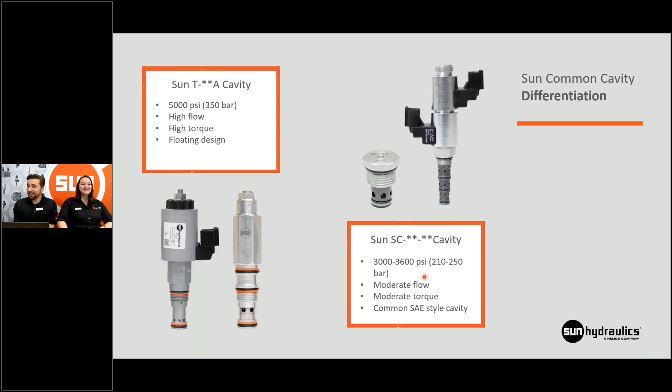Now when you want to integrate a Sun product into a manifold that already exists, you don't have to worry about changing out your cavity. We have more options for you now. So Dan, could I get you to start introducing some of these really exciting products to us? Yeah, absolutely, I can't wait. Let's have a look here.

The first product I want to introduce, I'll introduce about 10 products to you guys today. I want to start with the DNUC and the DNTC. These are 3-position, 4-way cartridges that have been out for about a year. Some more products I'll share today just came out last week, so you'll see a lot of new information too. The letter U in DNUC is size 10 common cavity, SAE 10. The letter T is common cavity size 8. Those are actually two of the most popular common cavity profiles. They're 4-port, 3-position, 4-way, and of course it's cartridge valve technology.

Comparing this to a CETOP valve for directional control: a CETOP valve is typically cast iron, a cast iron housing with a sliding spool inside - kind of a parts-in-body design, whereas this is a 3-position 4-way in a cartridge valve. That means you can put it into a custom manifold, making a small, tailor-made manifold for a specific machine. Compared to a CETOP valve, which has at least 4 O-rings between the CETOP valve and the valve below - those are potential leaking points - with a cartridge, you screw it into the manifold and only that uppermost seal is a potential leaking point out to the environment.

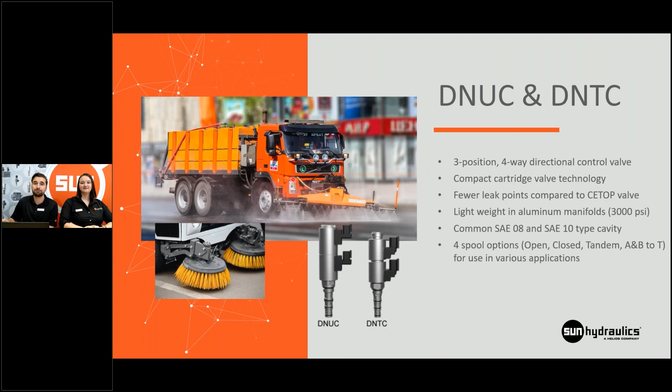Here's one example, let me share the hydraulic circuit. So here's your center condition - this is the closed center version. Energize coil A, and you'll flow from 3 to 2. Energize coil B, you'll flow from 3 to 4.

So that's kind of the profile of the DNUC and DNTC products. You can see the 2 different sizes here. If you need a very compact solution, we've got the size 8 DNTC.

Hey Dan, I see that we have solenoid coils on these. Are these a new solenoid coil that we're introducing? They are. So these coils are new, and they are specifically designed to power these products. There is some interchangeability with some of our historical coils, but the standard option is a new coil.

Okay, so you'll see those on the Sun website. You can look up the 779 coil for the size 10 products, and the 769 for the size 8 products.

And you can see in this hydraulic circuit, on the hydraulic cylinder, we've got our closed center DNTC here. And then on the right, for hydraulic motor control, we've got our A and B to tank, DNUC.

So just some examples of how some of these might be plumbed in as a 3-position 4-way. I'm going to control the motor clockwise and counterclockwise with my directional control valve, and here I'm going to control my cylinder's extension or retraction.

So this is kind of the heart of so many hydraulic systems that this was our first priority to launch in the common cavity family. Great.

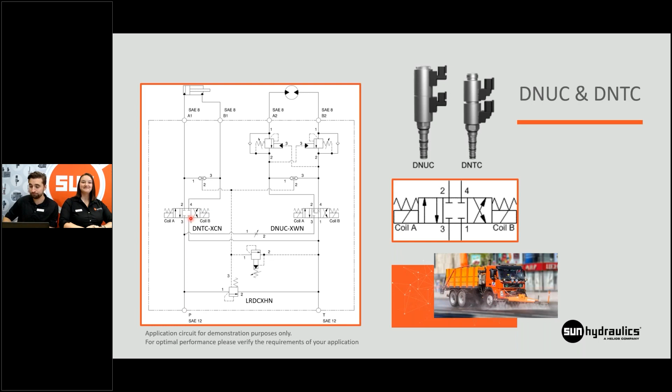So now, this one is brand new. In fact, if you search this one on the website, you might not see it yet. You'll see it in just about a couple weeks, but it is orderable - it's available today to order. But you'll see that spec sheet arrive in a couple weeks.

So the FNUC looks just like the DNUC I described on the last slide. It's a 3-position 4-way double coil valve, but it's an electro-proportional metering valve. So now I've got flow control capability.

By controlling the current to the coil, I can control how much stroke I'm pushing that spool, how much orifice I'm opening, and that allows me to have fine control with a joystick, with a potentiometer, with a sensor driving the valve. So this is more of the electrified, advanced hydraulic cartridge valve control.

It's a size 10, so we can do up to about 7 to 8 gallons per minute. So it's actually at that flow we can serve quite a few applications.

And there's 2 spool options on this valve: we've got a closed center and an A and B to tank, 2 of the most popular center conditions, and that can be used in various applications.

Finally, I want to share that with proportional control from Sun, what's our proportional driver? What's our proportional controller? It's our XMD. This is a picture of our XMD here, and an XMD can control 2 solenoids, a maximum of 2 solenoids.

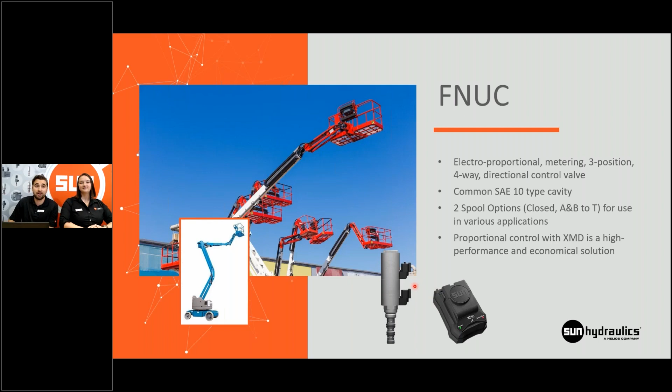So here's another application example - we share again a hydraulic motor. Now my FNUC is going to control the throttling, the metering of the flow, basically controlling the RPM of my hydraulic motor in counterclockwise and clockwise directions.

And FNUC, same story - I can now extend and retract my cylinder with variable metered flow. Here's the hydraulic symbol here. You got those parallel bars on the top and bottom of the circuit to show that this is a proportional valve. It slides and meters between the positions, not just on-off between the positions.

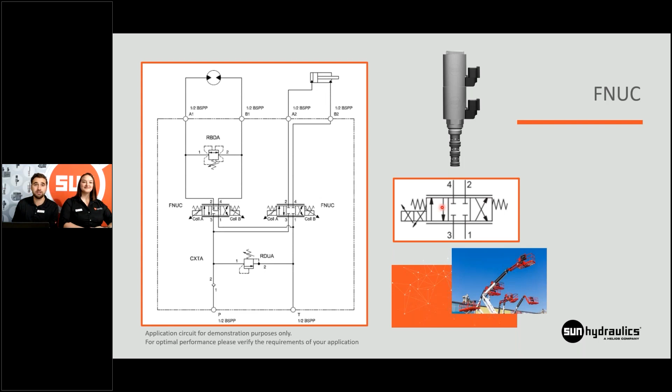We're really excited about this one because even in the Sun T cavity, we never had a 3-position 4-way direct-acting proportional solenoid valve. So the Sun Common product line has actually enabled a new function.

Okay, the next one is another new product, PRTS. So PR is a pressure reducing valve from Sun Hydraulics, and the T is common cavity size 8. This is a small size 8 cavity, 3-port electro-proportional pressure reducing relieving cartridge using a small 13mm proportional coil.

That's a new coil, 769 family. It's actually the same coil used on the on-off valve. And the advantage here is, Sun has had in the T cavity a comparable to a size 10, T11A cavity, high pressure 5,000 psi proportional reducing valve. But this in the common cavity is smaller, it's 3,000 psi, it's much more economical.

So this allows us to do proportional control for piloting. Typically a hydraulic pilot is limited to about 400 psi or so, or 300 psi. So this is just enough pressure. It can take 3,000 psi on the inlet side, but then it regulates and controls from 0 to 400 psi, or 435 psi. And that allows us to drive pilots to proportionally meter and feather the pilot pressure on hydraulic brakes, on hydraulic valves, on hydraulic clutches, on all different types of hydraulic transmissions or hydraulic systems.

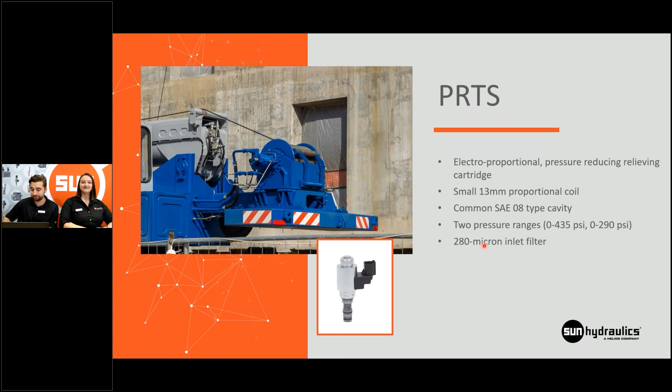Okay, so this is a nice economical solution. I feel that this product will find its way into many different applications. I'm really excited about our PRTS that's coming out. Yep, thanks.

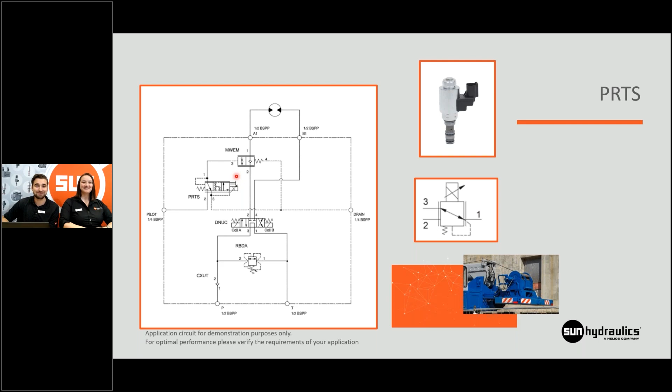Okay, we got some more products. These products have been in the market on Sun's website for about 5 months now. This is our, actually there's one new one in here too, the DMTA. But we've got our DMTA, DMUQ, and DMUT. These are all the same hydraulic circuit, the same hydraulic symbol, the 2-position 3-way. It's a very common on-off solenoid product.

The difference is that we've got two different pressure ratings on the size 10 product. We got a 1600 psi and a 3000 psi. Why offer those two? Again, this DMUQ, two-position three-ways are often used for piloting because it can drain and pressurize. In the normal position, it can drain; you energize the solenoid, you pressurize. So that two-position three-way is very popular for that, and the 1600 psi version is meant for pilot circuits, similar to the PRTS that we just explained.

This product can be used in the smaller, lower pressure pilot circuits, and it's more economical because we've pulled more of the cost out of it so that it's a 1600 psi product. The DMUT is your more typical 3000 psi common cavity two-position three-way. So if you need the pressure rating, we've got that option in the size 10 cavity.

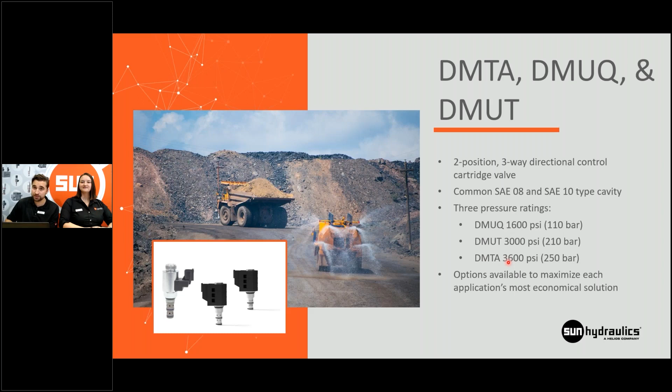So an example application, mining trucks, okay? Obviously these are very high flow devices, but they use pilot circuits to drive a lot of those high flow valves. For example, one of the functions on a water spraying mining truck is a hydraulic cylinder to open and close the water nozzle, like your kitchen faucet. You've got a small, low pressure system to open and close that nozzle.

And we can use our DMTA or our DMUQ or other products, and we can have a pressure reducing valve in there as well to limit the pressure to those nozzles. Normally draining to the tank, or energize the solenoid, and we'll send that pressure to the cylinder and lift it up.

Again, this product can be applied to so many thousands of applications. This is the fun part of hydraulics, we can work on lift trucks and mining machines and street sweepers, such a wide variety. Two-position three-way can be used in so many different applications. You work in technical support, do you see a lot of the two-position three-ways in a variety of applications?

Oh, definitely, a lot of the two-position three-ways. Are these direct acting or are they pilot operated, Dan? That's a really good point. These are direct acting products. What does that mean? Direct acting is when the solenoid coil is energized, that pushes the armature inside the solenoid tube, and that armature directly touches and pushes the spool. So there's a direct connection between the solenoid force and the spool, giving a very fast response time.

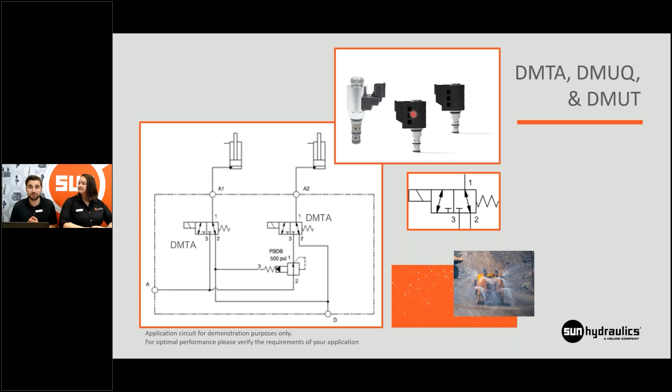Also, the direct acting product does not require a minimum pressure to operate. So if you're pressurizing your system on a lubrication system at 10 psi, you can't use a pilot-operated valve many times because there's usually a bias spring or something holding the main stage. So with a pilot-operated valve, we need to be concerned about the minimum pressure.

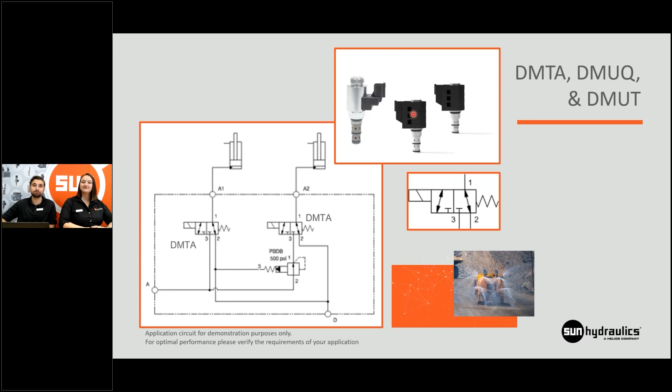Great, thanks. Yeah, good question.

For example, agricultural applications, hydraulic fan reversing with a four-way. You can reverse the fan. With a two-way, you can unload or load a system. But these are 3000 psi, and they also are direct acting construction as well.

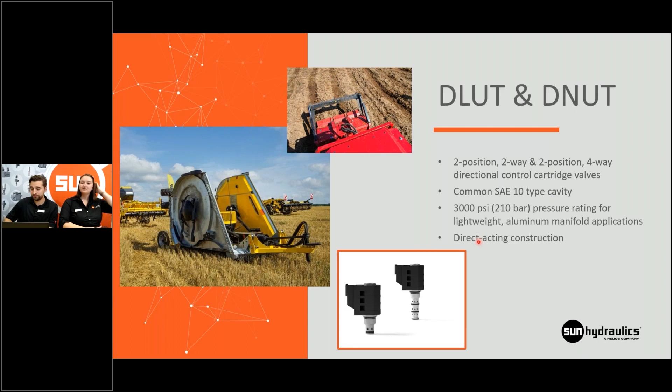But sometimes I need to reverse the direction of the fan, and that's where a product like the DNUT can come in, energize a solenoid, change the direction, and now you're reversing. You can always build an algorithm or control system where you lower the pressure on the fan to 0, change the direction, then ramp up that pressure again so that you can have a soft stop and a soft start solution on that fan. There's a lot of flexibility in a simple 2-valve circuit like this, which is really helpful. You can also add anti-cavitation check valves as well.

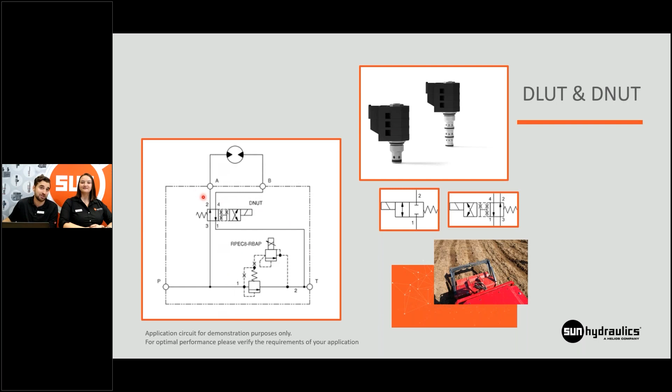Okay, another product that just hit the Sun website last week, RDUA, direct acting relief valve, common cavity size 10. How many direct acting relief valves in the common cavity size 10 do you think there are out there in the marketplace? If I had a nickel for every time we get a technical call asking if we have something interchangeable in the SAE cavities for relief valve, and it pains me to say I don't have an option. But now I'm really happy I don't have to tell our customers that anymore. That's awesome, I'm glad to hear that.

So again, it's a direct acting relief valve, common cavity size 10. This one actually goes against what we said earlier about the 3,600 PSI, because this product we've actually designed to be able to go up to 6,000 PSI. So there's been some engineering in this product so that we can get to higher pressures in the common cavity. That's one asterisk for this RDUA.

It's got a standard tamper-resistant cap, which is a little bit different from maybe your typical RDDA product. But when you purchase that RDUA, it's going to come with a tamper-resistant cap, and that helps with preventing unintended adjustments there. But you can easily remove that cap with a wrench, and you can go in there and adjust the screw. When our customers order the RDDA with a cap on it, they usually have to say a specific pressure setting.

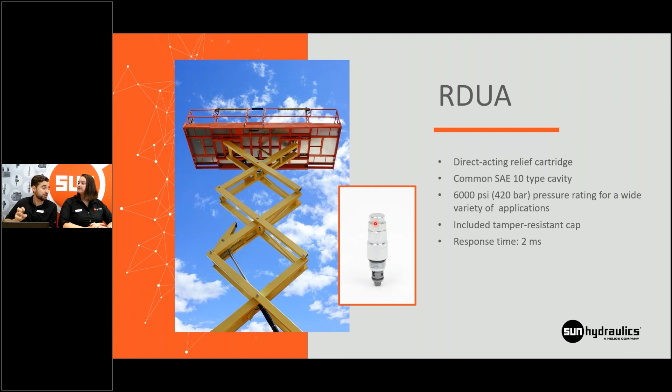Do they have to do that for the RDUA as well? No, this will come standard set with the cap installed, and if you need to change it, you can remove that cap. Great. The response time.

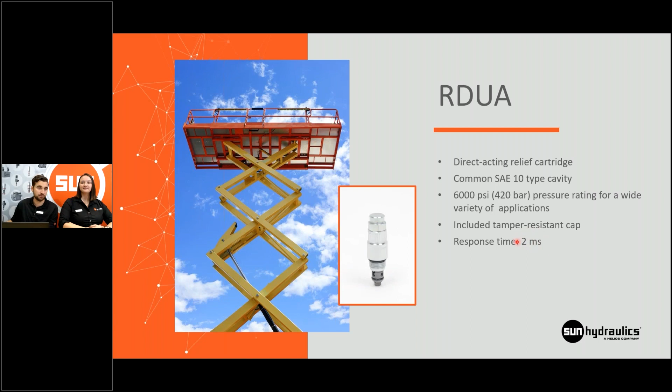Direct-acting relief valves, it's always good to remember, if you want to protect your system from pressure spikes, if you want to protect your pump from pressure spikes, that's where you use your direct-acting relief valve, because that'll be your backup, your safety mechanism to clip those pressure spikes and keep the system healthy. Again, we've showed the circuit earlier with our proportional 3-position 4-ways, but now I want to highlight, here's my pump, here's my check valve, and here's my direct-acting relief, which will clip those pressure spikes and keep that system healthy and protect everything.

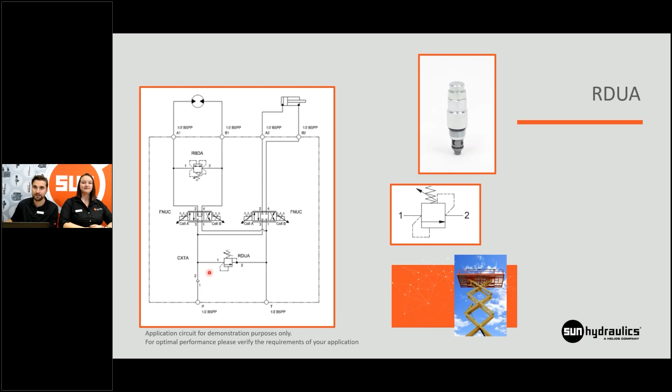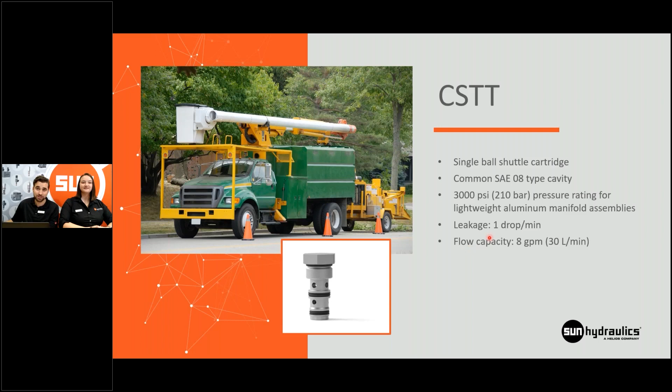Another product is a CSTT. It's a shuttle valve, a single ball shuttle cartridge, tiny one, size 8, common cavity, 3,000 PSI, 1 drop per minute leakage, very low leakage so that I don't have losses through my shuttle valve. The shuttle valve can be used on a load sense line. The shuttle valve can be used with an 8-gallon per minute flow capacity. That's actually quite a bit of flow I can push through this CSTT. So it can be used in some other functions as well if you want to maybe have some logic in your system. Like for a regeneration system, I've seen shuttle valves like this used before.

And then there's a hydraulic circuit here that shows, hey, I've got my 3-position 4-way cartridge to extend and retract my cylinder. And I want to take that pressure from the cylinder and I want to send it back to the load sense line. This load sense line can go to your load sense pump. This can go to your compensator cartridge. This load sense line can be used for various things. You can put a pressure sensor there if you want to know the pressure there. So now I'll know through my shuttle valve what's the pressure on the load sense line. That's used on some lift trucks like this service truck here.

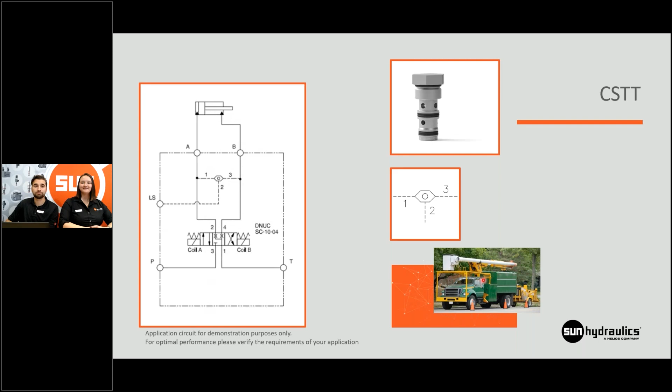This is actually the last family of products that I'm going to share with you guys that's available now, and that's the CXTA and the CXUT, 2-port check valves. We've got CXTA size 8, CXUT size 10. It's free flow from nose to side. That means port 1 to port 2. Port 2 is on the side, port 1 is on the nose. Size 8 and size 10, the CXUT is a common cavity size 10, 3,000 PSI. The CXTA, the small one, the size 8, we actually were able to rate it to 5,000 PSI. So it can be used in more applications: a steel manifold, an aluminum manifold, different applications.

And we've got 3 different springs: your anti-cavitation spring, your standard spring, and your high-pressure spring if you need a little bit more resistance on that check valve. And the flow capacity on the size 8 is a smaller valve. It's smaller, it's 10 gallons per minute. On the size 10, it's a 16 gallon per minute.

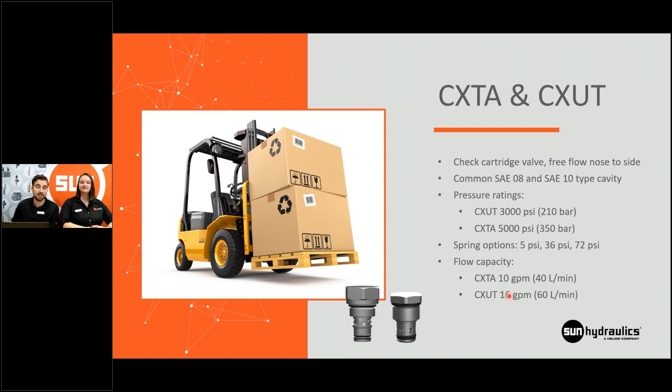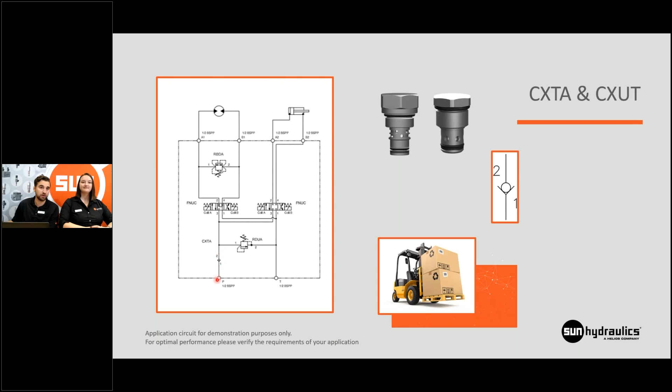Here's an example circuit again. That's the same circuit I showed before, but I want to highlight right off the pump, I've got this check valve. Many times that's used so that we don't unintentionally spin the pump backwards or forwards. So we want to ensure flow cannot flow back into the pump there.

All right, well, Sarah, thank you so much for giving me that 10, 15 minutes, maybe 20 minutes there to explain all those products. But if you don't mind, can you share a little bit more about the resources available? Yeah, of course, Dan. Thanks for sharing those. It's really, really exciting to see new products being launched by us and have common cavity stuff for you guys.

So with the common cavity specifications, we have all of these specifications loaded onto our website for you guys to easily download. You don't have to worry about calling or emailing me at technical support for getting these drawings on our website, sunhydraulics.com. In the cavity information area, we have all of these available for you to download. We have our size 8, 2, 3, and 4, as well as our size 10, 2, 3, and 4. So we're really excited to launch these 6 cavities. All the cavities also adhere to ISO 17209, which is the most common ISO standard for cavities out in the industry.

So when we created this product line, we wanted to make sure to incorporate into your systems as easily as possible. Sarah, the drawing on screen here can be downloaded from the website in English or metric. That's a really good benefit if you want to quality check a manifold that maybe was cut in the field or by a third-party manufacturer, and this specification is a new design from Sun. We just worked on this in the last 12 months.

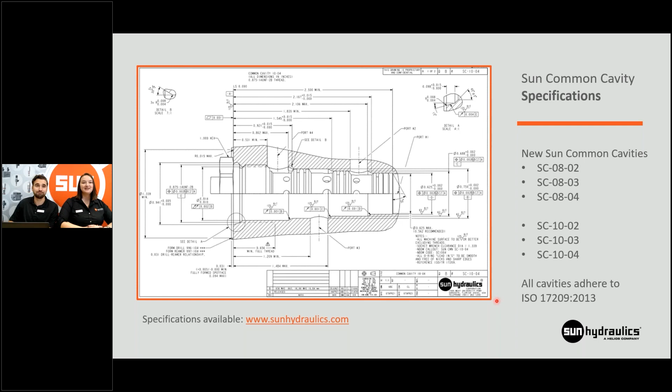We also have new manifolds being launched. We have line mount manifolds that are searchable on our website. The star represents various different fitting sizes for your different ports. They're completely searchable now under the cavity. When you filter under the cavity you want, you'll see these products pop up.

We also have our W62 and W72 C-top D03 launch for our 4-ways. Those 4-ways will be able to integrate on top of your stack, take your old one off, put our new one on, and so we're excited to launch those as well.

Sarah, I checked the website this morning, and when I clicked on manifolds and filtered all these Sun Common cavities, I saw more than 60 options. So there's SAE ports, BSPP ports, NPT ports, whatever kind of line mount manifold you need, it's there. Yep, we try and give you guys as many options as possible, and we stayed committed to that with this line as well.

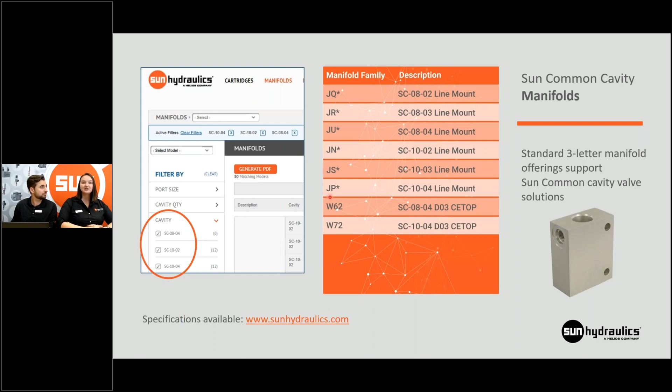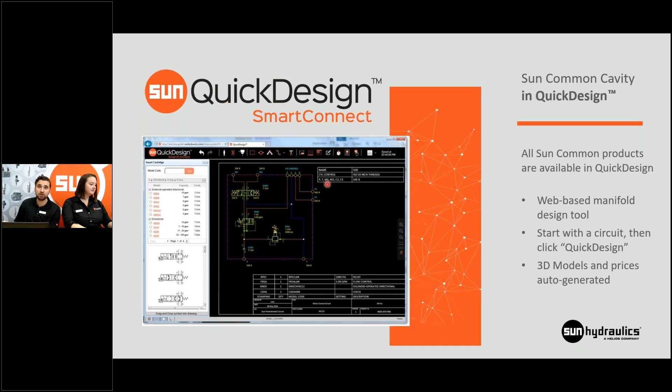And here, last but not least, we shared about 10 or 12 products today that are available now, but there's more coming. We're working to fill our common cavity portfolio so that we can have a wide variety of products to fit your needs.